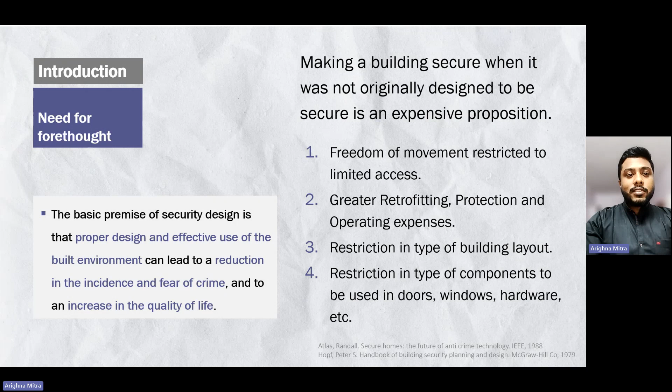Safety and security must turn into a design objective from the start. Architects have to sacrifice much more of a building's openness in retrofitting for security compared to if the building had been designed for security from the outset. Protection and operating expenses are greater than they need to be because of lack of forethought in the design phase.

A 2016 study says that for prospective students, campus safety is the fourth most influential factor when choosing a new campus.

Colleges in the medieval era were grouped together in quadrangles, following the traditional cloistered monastery layout, providing defense against foreign invaders and disgruntled townspeople. It was also a resourceful use of the limited land available to them.

Towards the turn of the 17th century, new worldviews, new public health attitudes, and a blatant rejection of monastic traditions led Cambridge to design buildings in a three-sided courtyard configuration. American colleges set up around this time were influenced by the Scottish colleges, which serviced different regions. For example, Harvard.

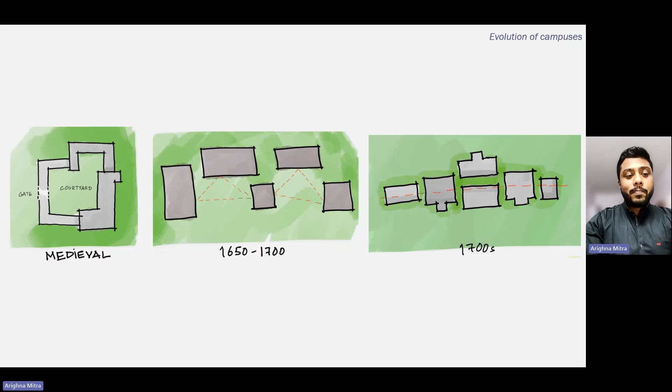Between the 1600s and early 1700s, colleges are seen to have separated buildings set in sprawling open landscape. Their planning reflected a desire to reach out to the community and towns around them. William and Mary and Yale tried to weave their campuses into a city's urban fabric through their planning.

In the mid-18th century, Princeton campus was set up. In the 1770s, the word campus was first used to describe such a type of layout. It was designed as a college located along one side of a green space. However, today, the word campus has come to denote the grounds of a university or college, regardless of whether it has green spaces or not. The sparse arrangement of buildings, as demonstrated at Princeton, symbolizes the distance of the college from the outside world. Campuses function as separate entities while closely observing the outside world.

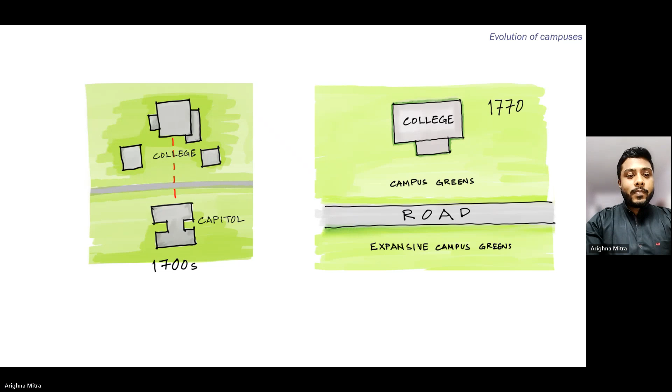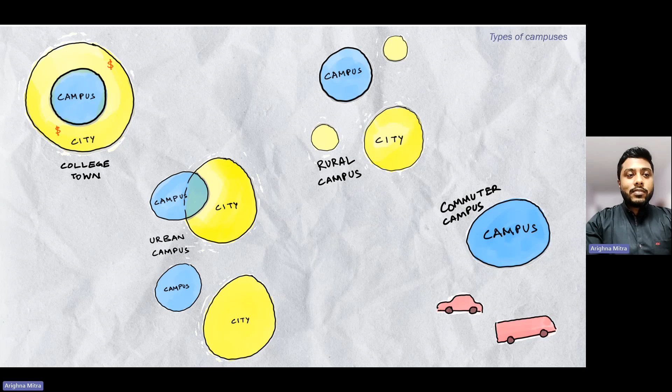Today, campuses may be of different kinds. You may have a college town, where the city is economically benefited from the college, and the city and campus are closely related. The rural campus, where the campus is large, open, and away from the city. The urban campus, where the campus might be part of the city's fabric, or perceived as an isolated entity in a big city. And commuter campuses, where students, faculty, and staff commute to the campus for work and live off campus.

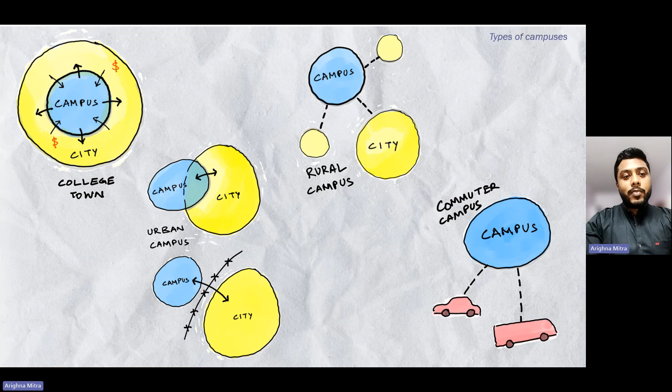Educational campuses need not be totally closed off from the public in order to provide students with a safe and secure environment. Openness to promote discussion and collaboration for education and research makes it difficult to secure them. In a large, open, and urban setting, it is easy to penetrate the perimeter and get lost in the crowd.

Individuals' perception of safety from crime in an environment is determined by a variety of factors, including personal experience of a place, its physical appearance, and characteristics of the individual.

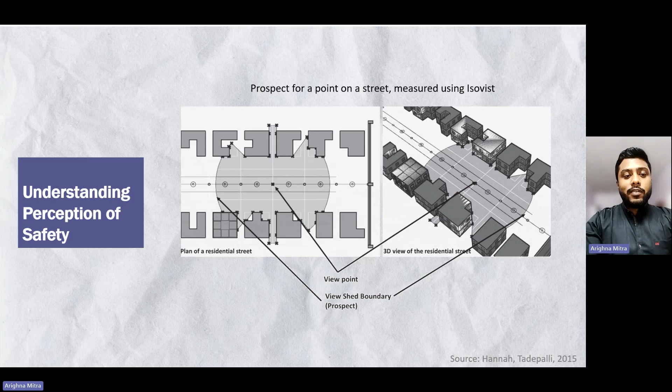Perception of fear is influenced by prospect, refuge, and entrapment. Other variables include student demographics — males have a safer perception of safety in various places considered potentially dangerous, in contrast to females — the presence and type of security personnel, and the rural or urban setting of the campus.

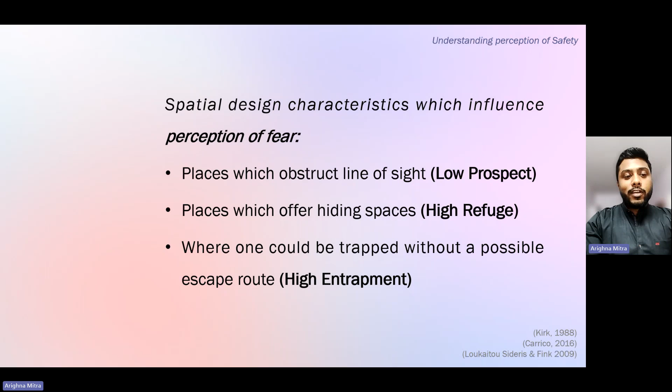Jane Jacobs observed how people occupy and behave in a space. She stated that in order for a city street to be thriving, it must have three qualities: clear demarcation between public space and private space, ownership of public space by those who would be regarded as natural proprietors of the street, and constant users to add eyes on the street and induce people in the buildings to watch the sidewalk.

Oscar Newman, in his book Defensible Space, 1972, focused on the architectural layout of the buildings. Newman outlined three elements to create defensible space: territoriality, creating perceived zones of territorial influence and providing natural surveillance opportunities; and image and milieu, designing to influence the perception of a project's uniqueness, isolation, and stigma.

We must consider the campus as both a social and physical environment. If we were to consider it only as a physical environment, then target hardening strategies would have been the primary means of alleviating concern. The social environment is often more important in determining the perception of safety than the physical environment.

CPTED objectives are to prevent crime through natural surveillance, discourage crime by increasing the risk of apprehension of criminals. The architect is key to opening the opportunities inherent in the CPTED approach. Within his competency is the ability to know when an express security concern cannot be fulfilled by a particular design idea, and how to lead a design security professional to an alternate idea.

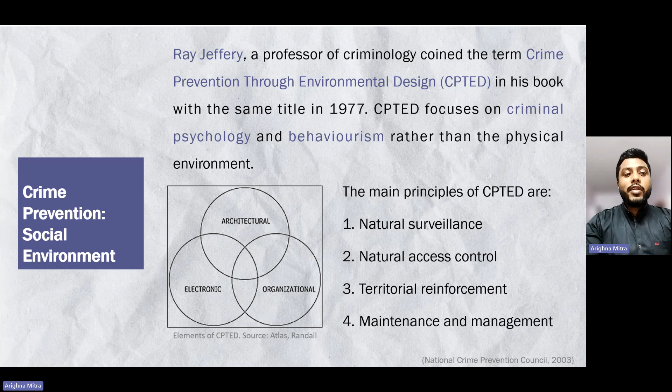For the analysis of spatial configurations, we can turn to space syntax. It tries to explain non-discursive properties of space by showing the way elements should be connected to better understand the perspective of users. It has been used in the past to predict correlation between spatial layouts and crime, traffic flows, etc.

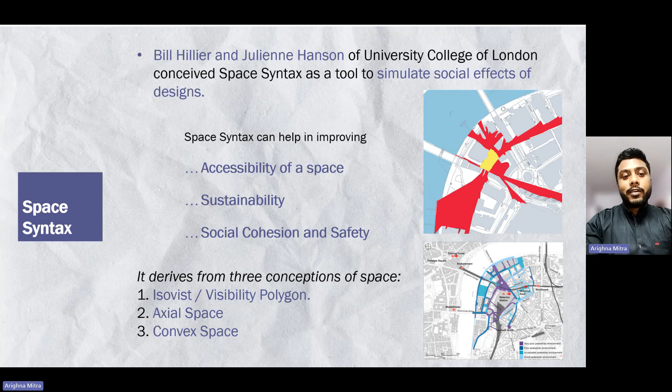Integration analysis shows the cognitive complexity of reaching a street, which is a marker of pedestrian use of the street. In practical terms, it shows where people are more likely to end up.

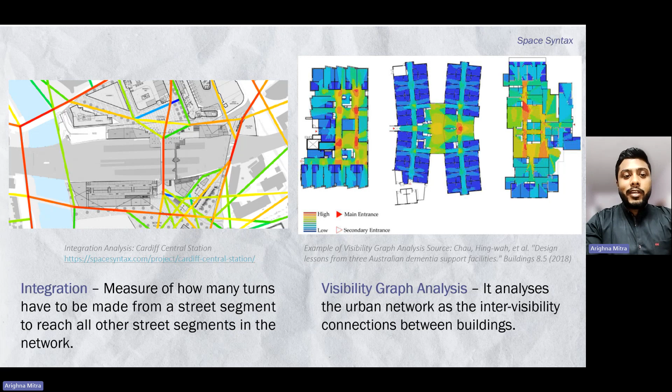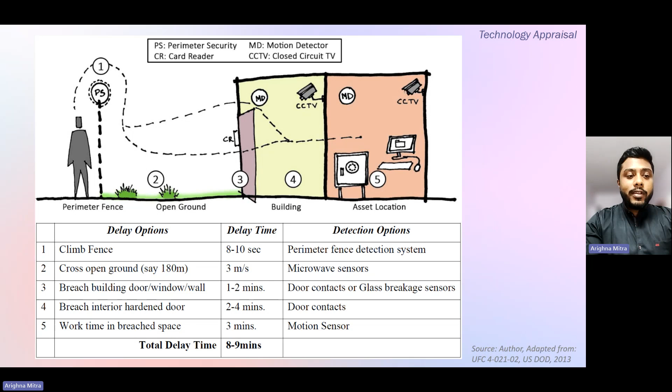Of course, technology also plays a crucial role in crime prevention and can help to either secure the users, protect the assets, or ensure smooth operations. Electronic security systems are a part of a bigger, more comprehensive physical protection scheme. If used correctly, it can create delay in the event, giving us enough time to respond to the threat.

Coming to the analysis of campuses, the choice of campus had to be such that they can be compared on the basis of planning and their context. There had to be a similarity in non-architectural aspects in order to effectively understand the impact of architectural aspects on the security of the campus. The chosen campuses also had to be catering to a similar demographic, having similar academic programs, security management.

IIT Roorkee has a rich history, started from 1847 when it was established as Thomson College of Engineering. A typical university layout mixed with mixed land use was adapted as the university continued to expand. Parts of the campus were also open to the public, whereas IIT Delhi was established in 1961 and was designed as a closed-off urban campus with separate zones for academic and residential purposes. The two campuses also differ in their context.

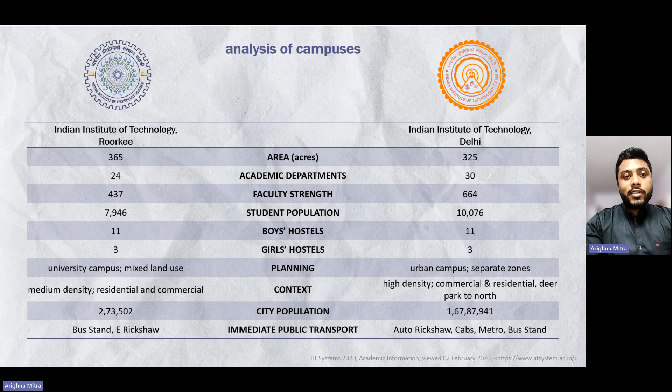Let us begin with the case of IIT Roorkee. A semi-structured interview with the campus security officer revealed concerns regarding multiple access points and having public institutions like the bank and the post office at the center of the campus. The security officer also said that in new campuses, planning must be done so that all academic buildings are zoned together and all residential and hostel buildings are zoned together.

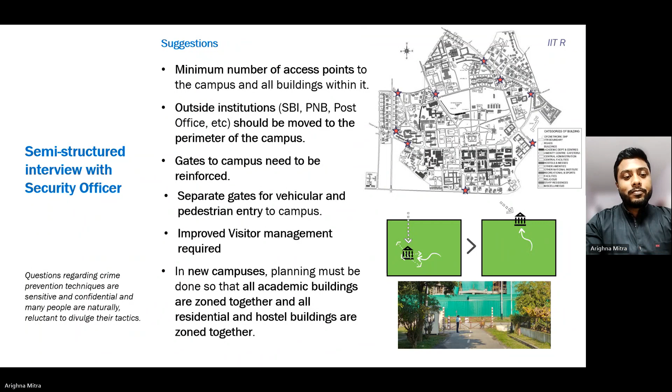Unstructured interviews reveal more nuances regarding providing security for a campus. While technology has helped with surveillance, things like viewing angles and power backup should be considered. Simple things like distance of toilets and guard posts can also make a big difference to effective surveillance and support.

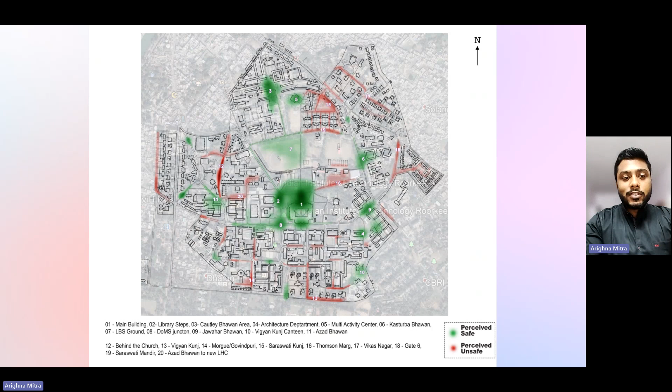A survey was carried out with over 50 students, faculty, and staff in the campus. They were asked to identify 3 spaces which they perceived as safe and 3 spaces which they perceived as unsafe. Accordingly, this map was prepared from the responses. Locations marked in green are perceived safe, and the tonal value reflects the number of responses. Likewise, for perceived unsafe spaces, which are marked in red.

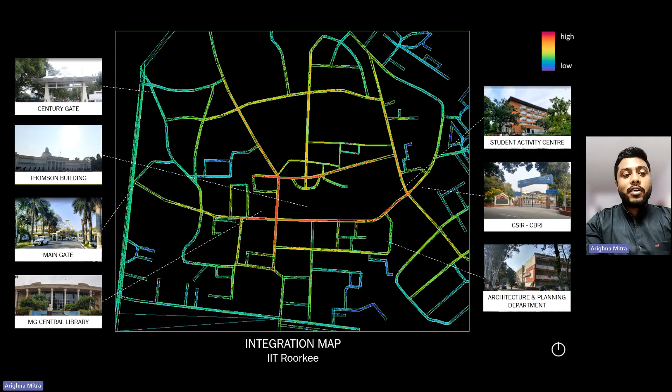This is the integration analysis map for IIT Roorkee prepared using DepthMap X. The streets in warmer tones have higher integration, meaning these are preferred by pedestrians for moving around the campus, and thus will also have higher natural surveillance.

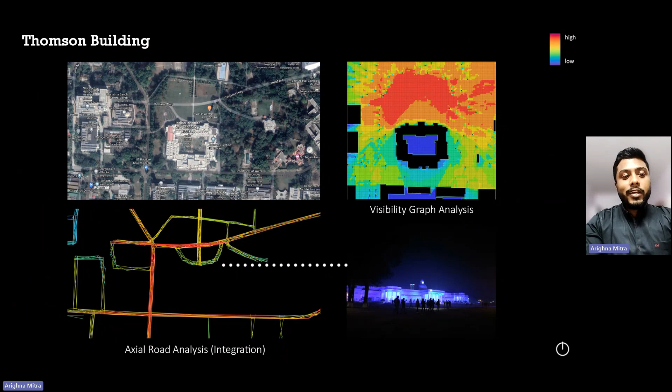Each of the 3 perceived safe and unsafe spaces is analyzed separately. For example, the Thomson building is perceived as most safe. The visibility graph analysis and integration analysis suggest the same. The factors which help in its perception as safe can be summed up as high prospect, low refuge, and low entrapment.

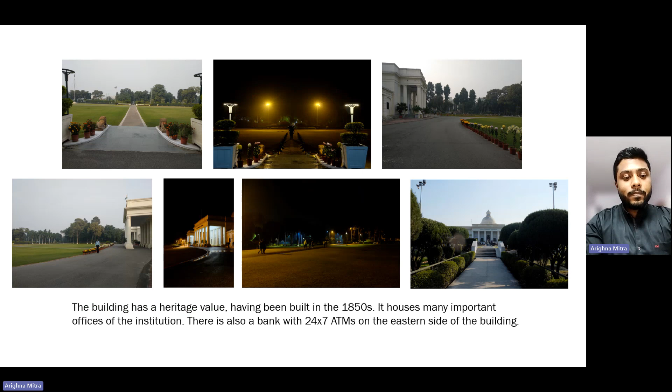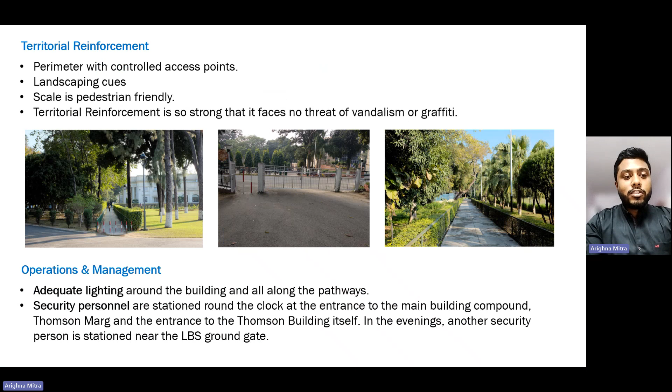CPTED principles of natural surveillance and legibility, territorial reinforcement, and operations and management are all fulfilled in this case. For each of these spaces, I also prepared my set of suggestions regarding how to improve the safety and security of these spaces.

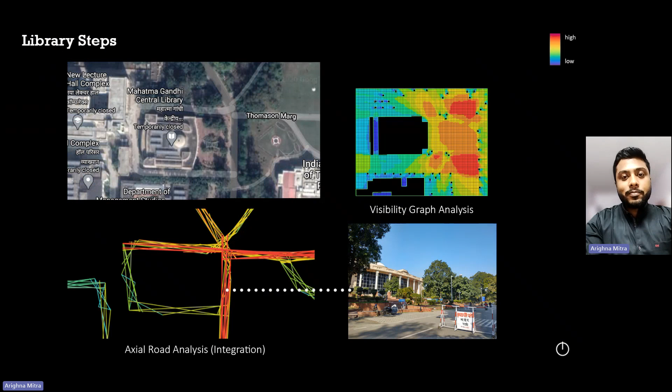The library steps are perceived as the second most safe space, and the Cautley Bhawan area is perceived as the third most safe.

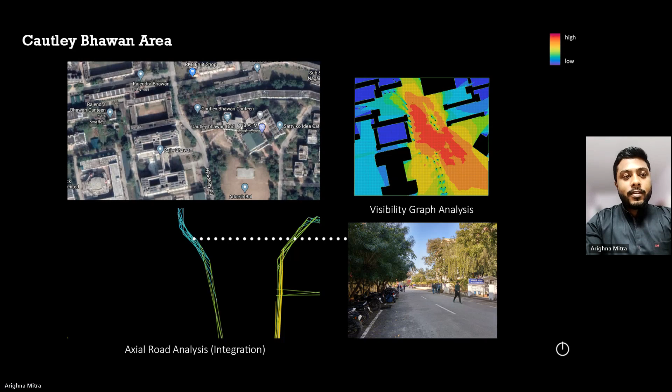At the other end of the spectrum, the street behind the church was perceived as the most unsafe space in the campus. The Vigyan Kunj area was perceived as second most unsafe.

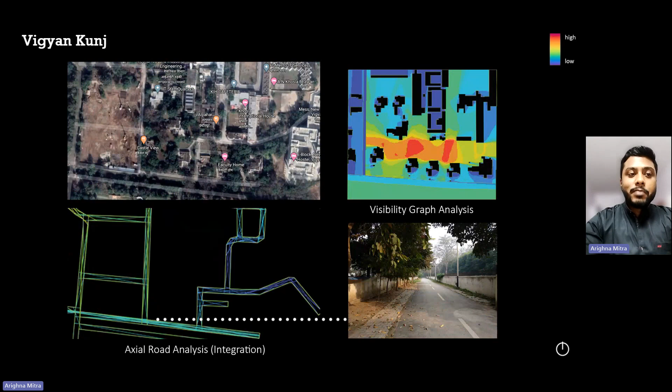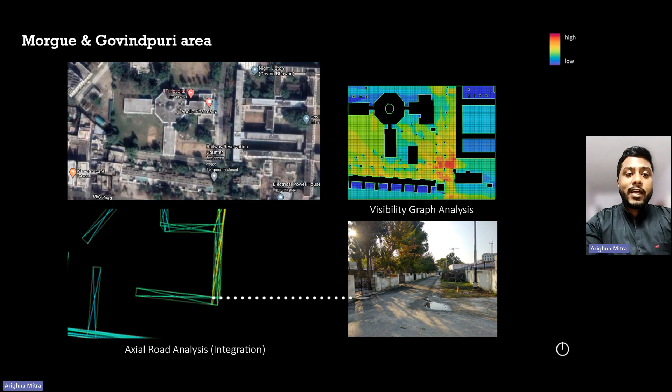The area near the hospital morgue was perceived as third most unsafe. The integration analysis and visibility graph analysis, in addition to presence or absence of CPTED principles, also says the same.

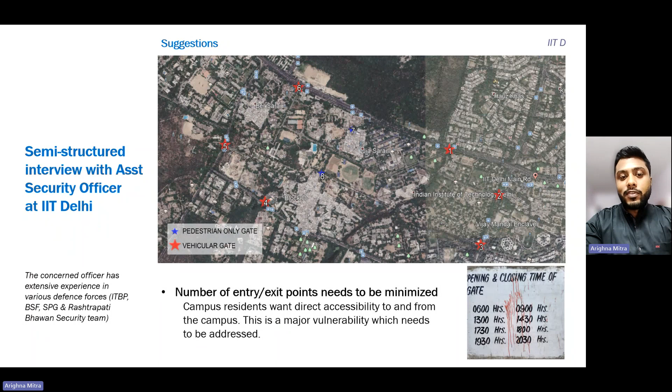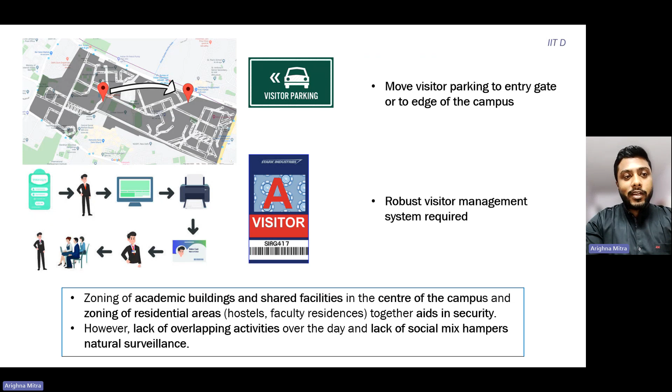Coming to IIT Delhi campus, a similar semi-structured interview was conducted with the concerned security officers at IIT Delhi as well. In addition to his suggestions regarding access visitor management, he made an astute observation that the lack of overlapping activities over the day and the lack of social mix hampers natural surveillance.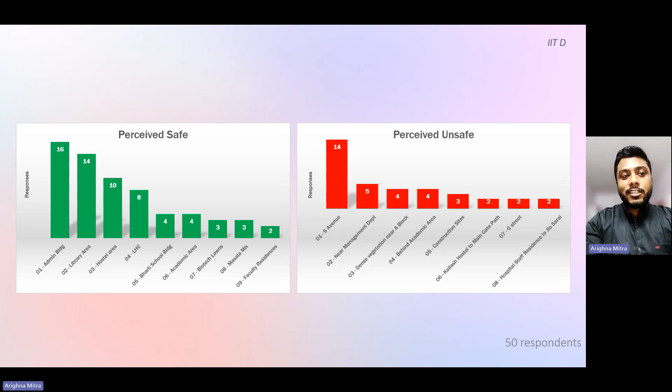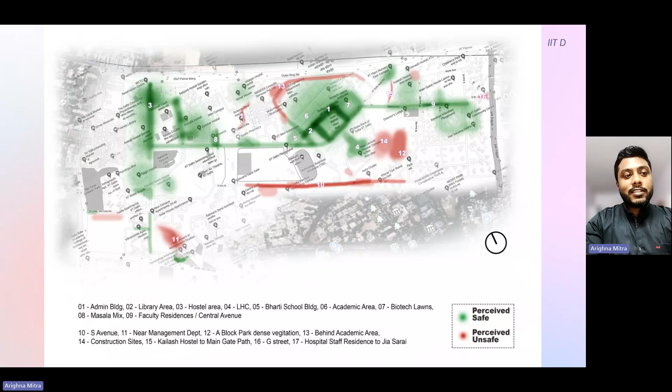Just like the Roorkee campus, a survey was conducted here as well to identify the perceived safe and unsafe spaces. This map was prepared from the responses. The areas marked in green are perceived as safe, and the areas marked in red as perceived as unsafe. For example, almost the entire stretch of S Avenue, which you see at the south of the map, is perceived as unsafe by many respondents.

This is an integration analysis map of IIT Delhi. There's an inconsistency from the real world here, as the analysis says that S Avenue has high integration.

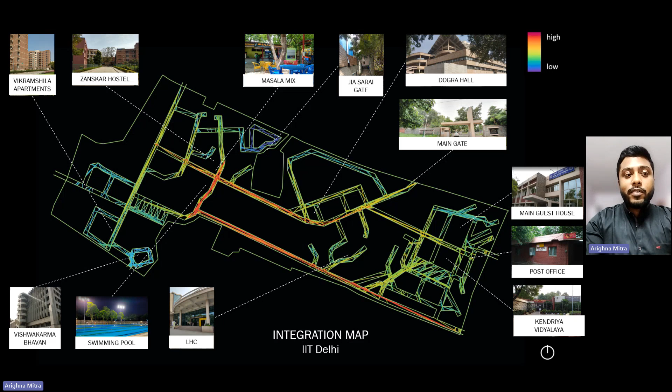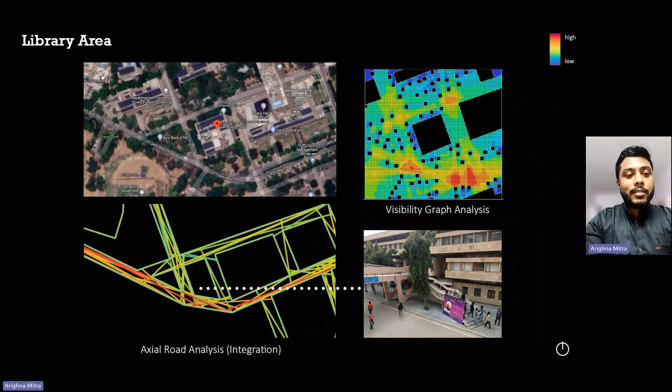The administrative or the main building is perceived as most safe. The library area was second most safe in perception. The boys' hostel area was perceived as third most safe, and all this is consistent with the space syntax analysis.

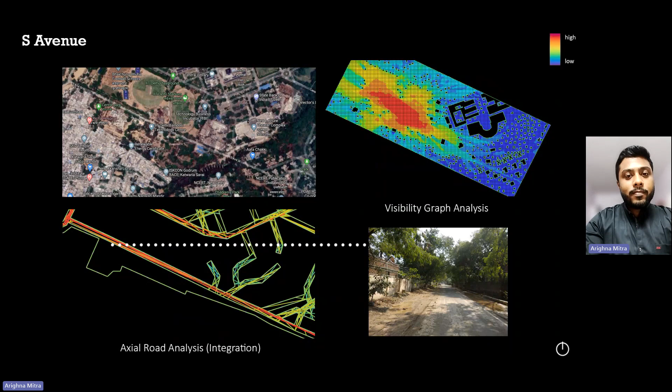S Avenue is perceived as most unsafe. The path to the management department, which cuts across dense vegetation, is perceived as second most unsafe. The pathways near A block, which are also along dense vegetation, is perceived as third most unsafe.

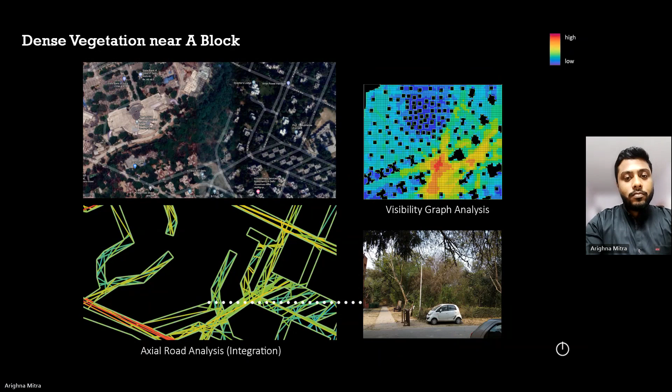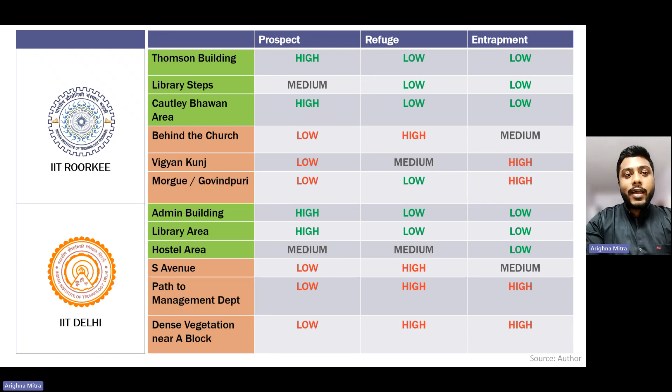This table shows the elements contributing to the perception of safety for both campuses. We see that the values of prospect, refuge, and entrapment are highly consistent with the perception of these respective locations.

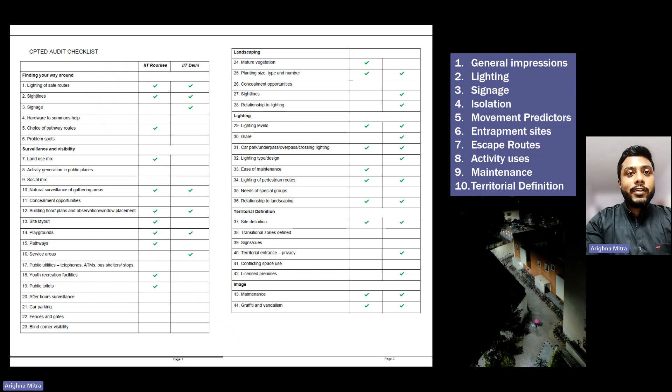Finally, a CPTED audit checklist was followed, which evaluated the campus on these 10 parameters: general impressions, lighting, signage, isolation, movement predictors, entrapment sites, escape routes, activity uses, maintenance, and territorial definition. Both campuses had very similar results.

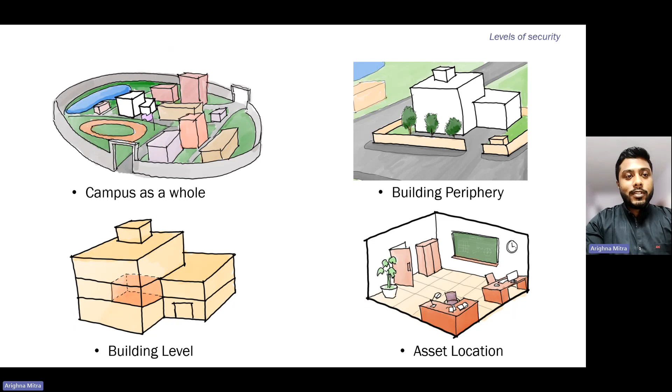Now let us turn to the recommendations at four lines of defense: the campus as a whole, the building periphery, the building level, and the asset location. So, the recommendations at campus level.

Mixed zoning, where institutional and public buildings are dispersed throughout the campus between residential buildings, greatly increases natural surveillance and creates opportunities for overlapping activities. Consider providing an optimum land use mix when drawing up the master plan. However, segregated zoning allows for more efficient and economical protection by the security agency.

Activities should be placed thoughtfully throughout the campus. Site planners and architects have a crucial role to play in this by creating spaces of activities where the whole community can be engaged. It can also provide public health benefits and improve the quality of life, in addition to encouraging social mix.

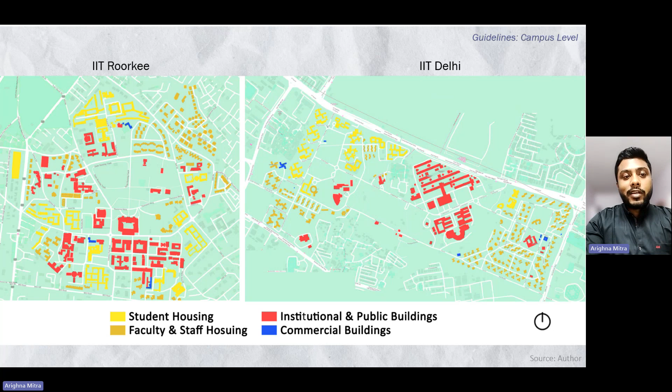Activity support implies a large variety of activities which will attract people, thereby increasing natural surveillance and territoriality. Spaces should be designed to encourage community events and overlapping activities. Having a strong sense of community is linked to lower crime incidents. Walkable neighborhoods have a high sense of community.

Entry to the campus should be highly regulated and the number of gates minimized. Timings for all gates should be defined. Vehicular and pedestrian traffic has to be segregated at the gates. Active vehicle security barriers should allow the flow of vehicles only after appropriate entry in the visitor management system.

Separate visitor parking locations should be designated near the main gate. Visitors should be encouraged to walk or make use of public transportation. Avoid providing parking in an area being controlled. Additionally, all parking spaces and access to them should be well illuminated.

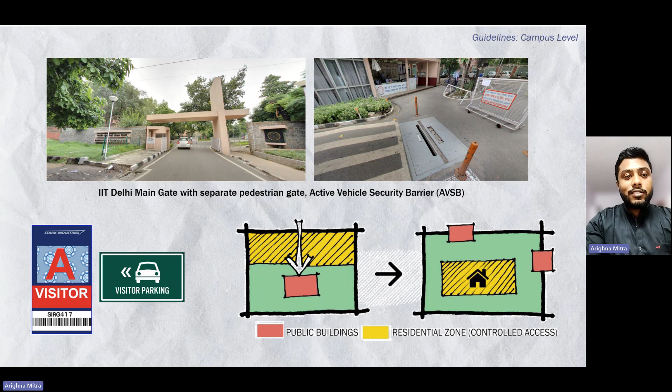Buildings which require public access should be placed at the outer periphery of the campus, preferably near the main gate and visitor parking. Housing should be placed at the central core of the campus.

While cul-de-sacs increase territoriality, they also increase entrapment, increase refuge, and decrease prospect. Thus, they must only be used in areas with high natural surveillance. Appropriate activity support can also aid in increasing the natural surveillance of cul-de-sacs.

The placement of licensed premises in a campus master plan should be considered from the aspect of aiding security. They aid natural surveillance, create legibility, and enforce territoriality. Public utilities like ATMs, bus stops, and shops should be carefully placed. Playgrounds and recreation facilities should have clearly defined hours of operation and sight lines from neighboring buildings.

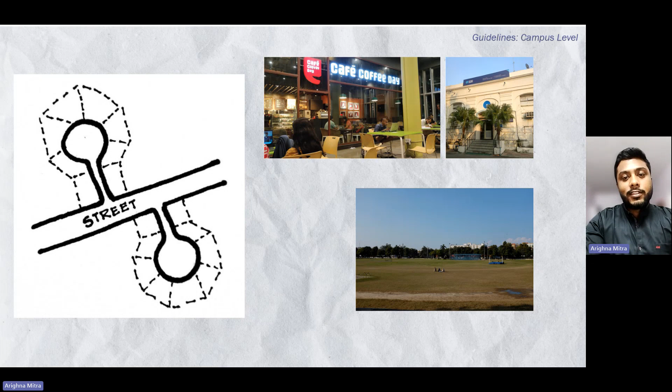Other recommendations at the campus level focus on landscaping, illumination, and site planning. Site layout should define public space and private space by real or symbolic barriers. Real barriers include fences, walls, gates, hedges, plantings, and railings. Symbolic areas could be transition areas using a hierarchy of lighting, changes of texture, and levels.

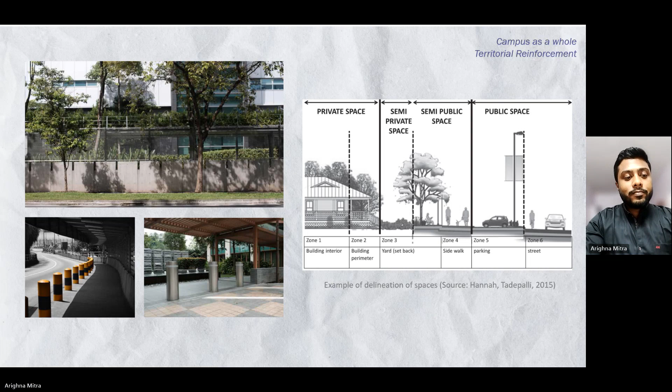While planning for the security of the whole site, you also have to consider interconnected buildings, parking locations, and planning for operational needs. Landscaping, hard or soft, should be considered an integral part of the design scheme.

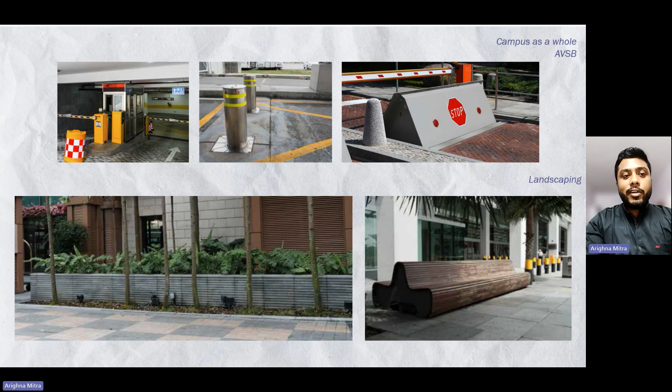Arbitrarily placed landscaping can provide concealment for potential intruders. Opportunity for vandalism and graffiti can be reduced through tactically placed planting.

Packs of aggressive stray dogs are a significant deterrent to the safety of campus residents. Pedestrians avoid areas with aggressive dogs, which dramatically reduces natural surveillance. Stray animals tend to grow in population in areas with easy access to food, near trash cans or garbage dumps, feeding off kitchen scraps. The focus should be on rescuing, rehabilitation, and rehoming these animals.

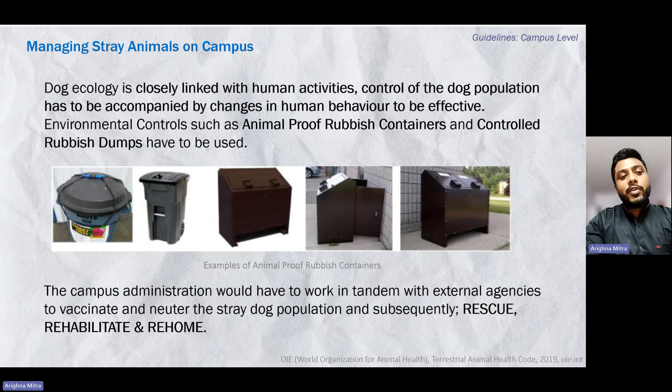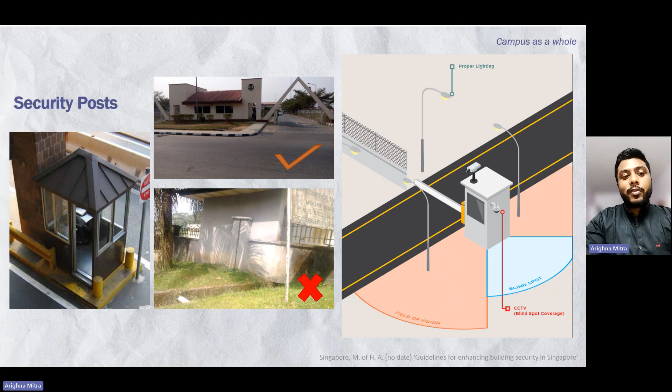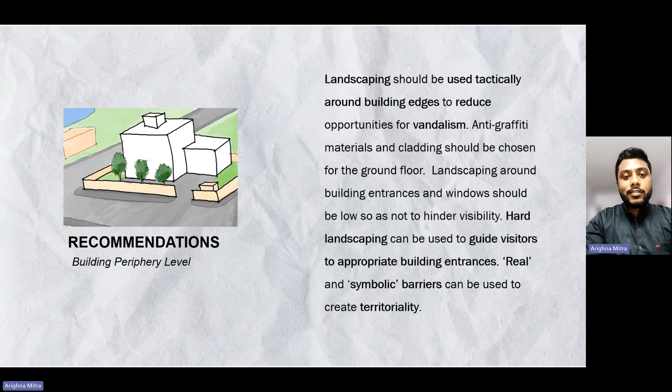Coming to recommendations at the building periphery level, these focus on landscaping around buildings, barriers, approach roads, parking, building facades, and architectural features. Street art can be used to make spaces pleasant and lively.

Street art can be used to make spaces pleasant and lively. Chain link fences should be favored over plank walls higher than 4 feet in order to maintain natural surveillance and avoid a sense of isolation.

Resident and visitor parking near building edges should be segregated. It is advisable to maintain a line of sight from the building and from within the building to the parking location. Vehicle access may be restricted in certain parts altogether, and adjoining streets should have unobstructed views to entrances to individual buildings along with appropriate signage.

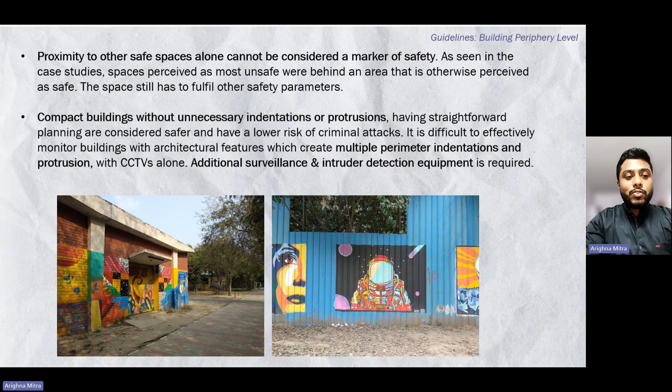Architectural features on the ground floor which act as a platform or climbing median should be avoided. Trees which provide easy access to upper floors should be trimmed or relocated. Sprawling buildings with multiple perimeter indentations allow hiding places, places for ambush of pedestrians, and allow criminals to operate unseen. Unnecessary indentation and protrusion along a building perimeter should be eliminated.

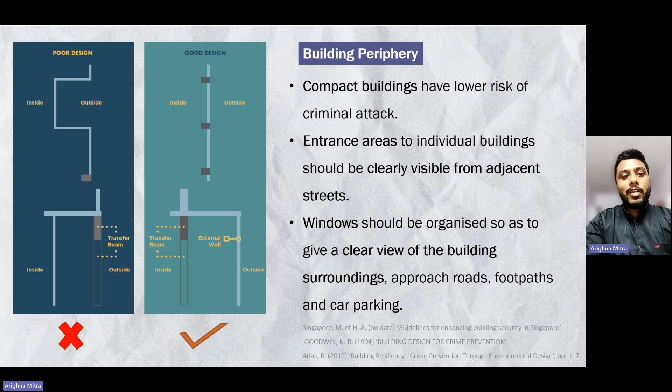At the building level, a population exposure model like the one used by public health professionals can help visualize the vulnerability of target areas. Doors and windows should adhere to CCTRF standards, that is California Crime Technological Research Foundation standards.

The building should have a minimum of two emergency egress routes without conflicting with the need to keep a minimum number of access points for security purposes.

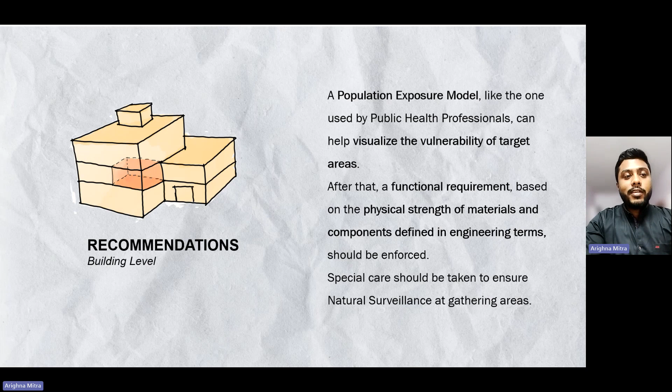Landmark value of individual buildings can be leveraged towards lending legibility to the vicinity. In older campuses, rundown buildings or offices and facilities which are closed down are excellent candidates for adaptive reuse, creating exciting spaces for the community and generating positive activity support.

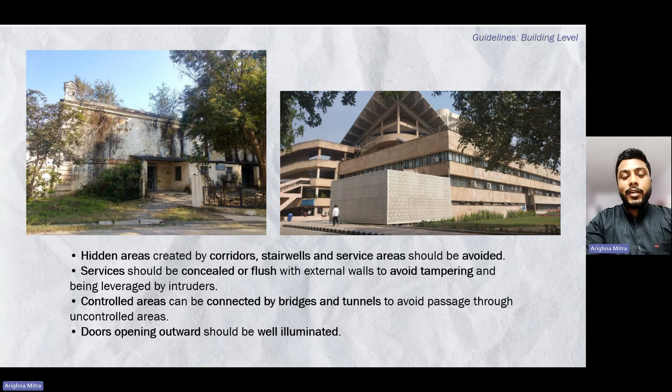Instead of pushing service areas, servant spaces, to isolated parts of the campus, they can be incorporated into the design of the existing building blocks closer to the spaces they serve.

Material finishes should be carefully considered. Bright and vibrant material finishes should be used to create an inviting atmosphere and inspire feelings of safety. Street art can be used for external blind walls.

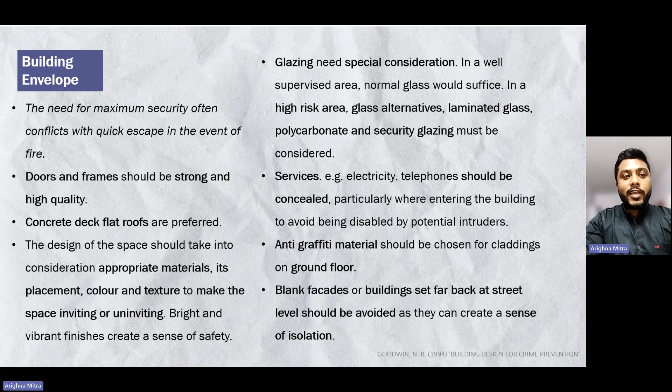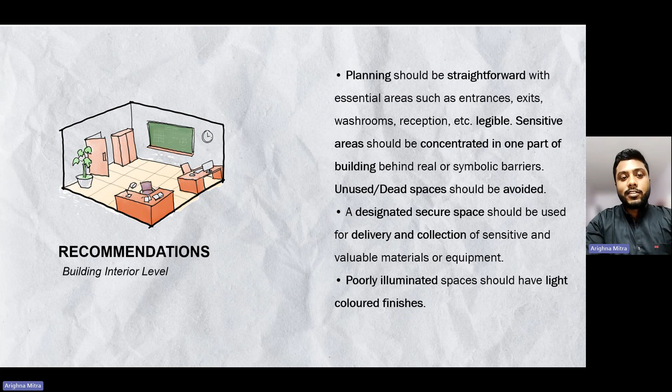If CPTED is implemented excessively without regard for equitable and thoughtful process, it can turn into an oppressive mechanism for social control, creating over-fortified communities.

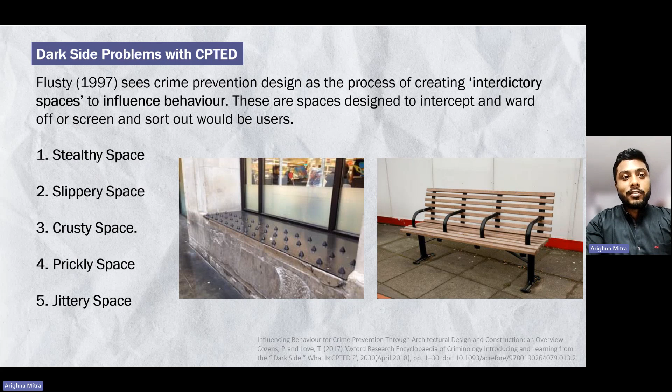Some of the resulting dark side problems are stealthy spaces, areas which are deliberately hidden from general view; slippery spaces, those without visible means of approach; crusty spaces, spaces that cannot be accessed because of obstruction. These may be walls, gates, checkpoints; prickly spaces, uncomfortable spaces due to measures inhibiting activities; jittery spaces, spaces under constant observation, both positive and negative.

In order to combat dark side problems, avoid creating spaces too far back behind the barriers. They suffer from lack of legibility and natural surveillance. Show restraint in territoriality and legibility, otherwise the space feels unwelcoming and detached from the rest of the campus. Avoid the overuse of barbed wires, anti-intrusion barriers, and target hardening measures, which give the building an appearance of a fortress.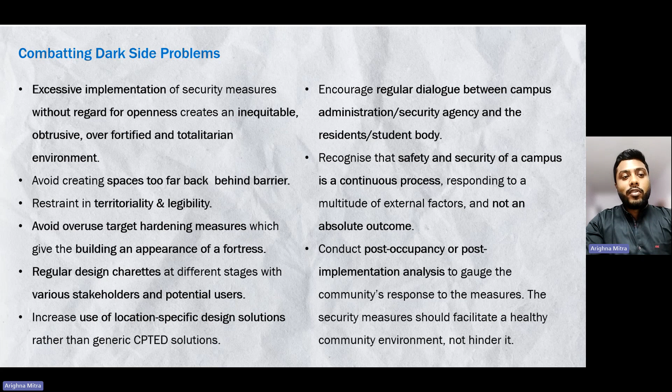Organize regular design charrettes at different stages with various stakeholders and potential users, considering the needs of vulnerable groups. Encourage regular dialogue between the campus administration and campus residents.

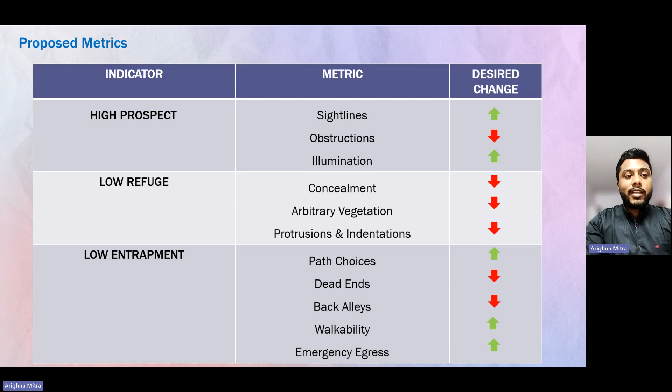In summary, we can identify clear indicators, their metrics, and desired change over time. This can help guide architects and planners and help integrate security in the design of educational campuses. We have indicators like high prospect, low refuge, low entrapment, increased natural surveillance, increased legibility, favorable space syntax analysis, increased territorial reinforcement, and better operations and management.

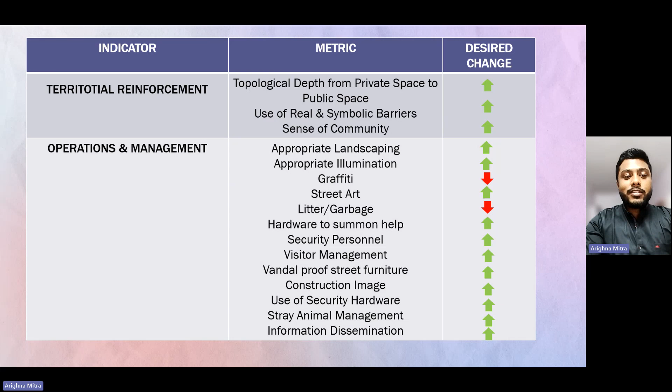There is a need for further research into assigning appropriate weightage for the different metrics. Weights of the various elements need to be decided carefully in order to get an accurate picture without any bias.

The onus is on the campus administration to provide a safe learning and working environment. Physical measures have to continuously evolve to cater to changing security requirements. Mobile applications and smart buildings have come in a big way and are becoming increasingly more accessible. Campuses must leverage existing technologies and be ready to assimilate emerging technologies.